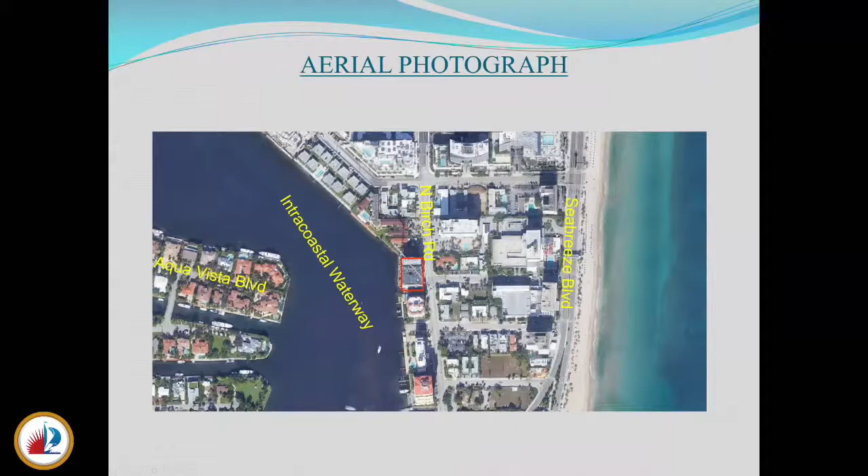This is another aerial photograph, and you can see the triple pile clusters out here in the water. They're a little difficult to see, but these are at 75 feet from the property line. And you can see the channel marker is way over here.

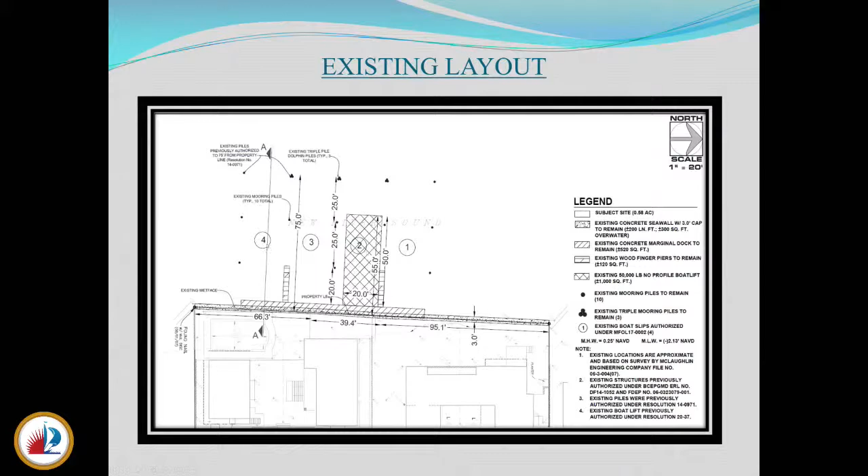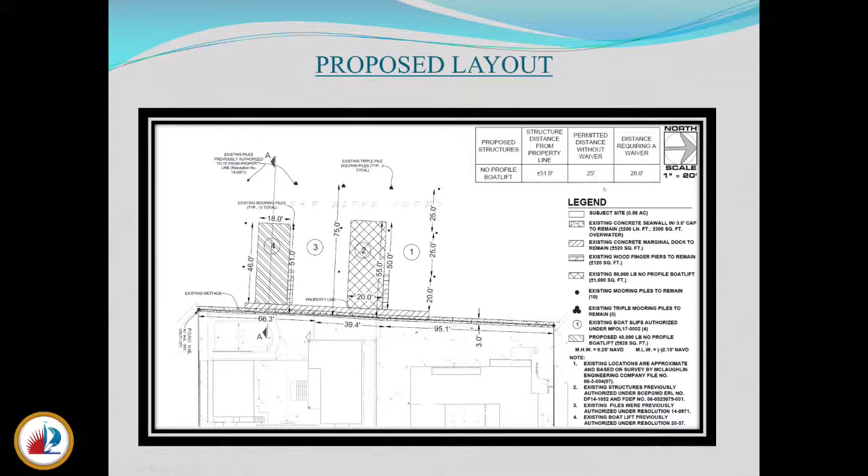This location, slip 4, is where we are proposing a 40,000-pound no profile boat lift, 51 feet from the property line. The lift is 46 feet by 18 feet, and this is to accommodate a 40-foot vessel. So the structure is 51 feet from the property line. The allowed distance is 25 feet, so we're requesting a waiver for 26 feet.

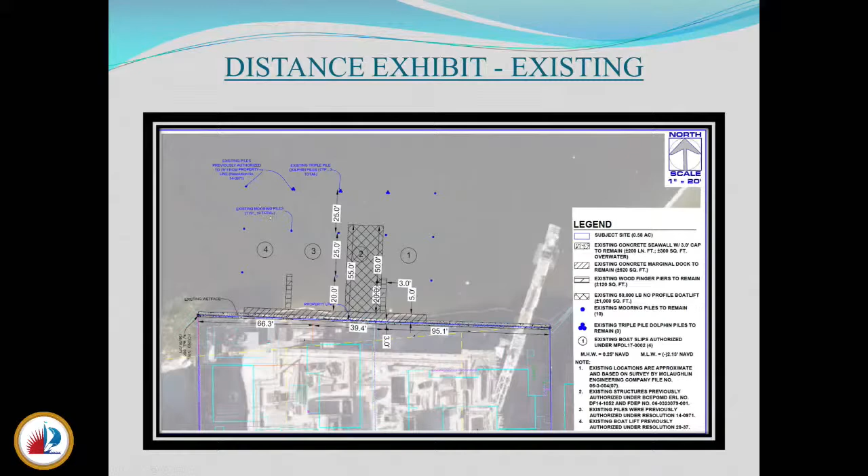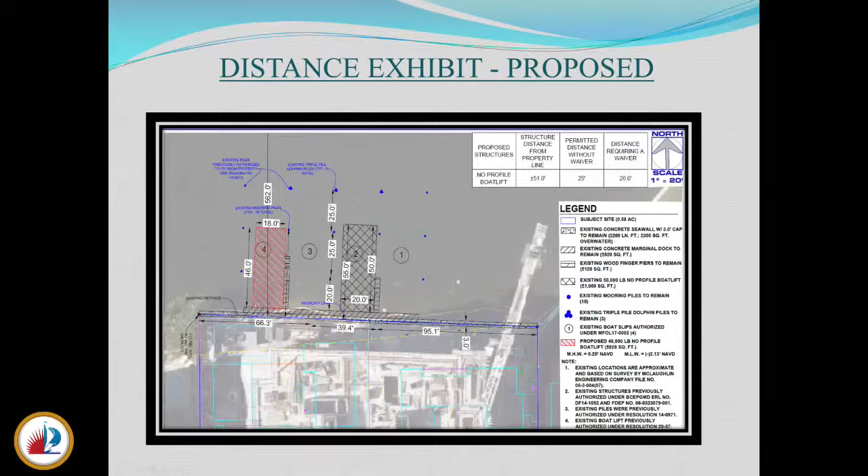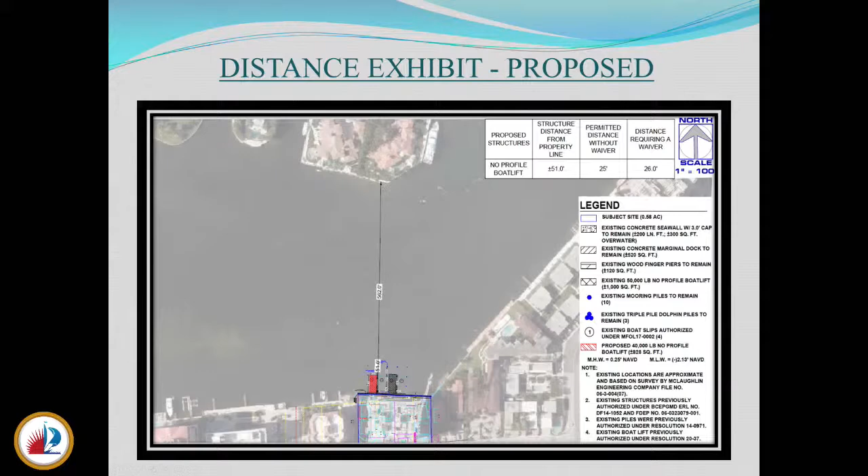Here's another view so you can see how wide the waterway is in this location. You can see in the red is where we have the proposed lift, and it's 562 feet across the waterway here. So again, 51 feet from the property line, and we're requesting a waiver for 26 feet.

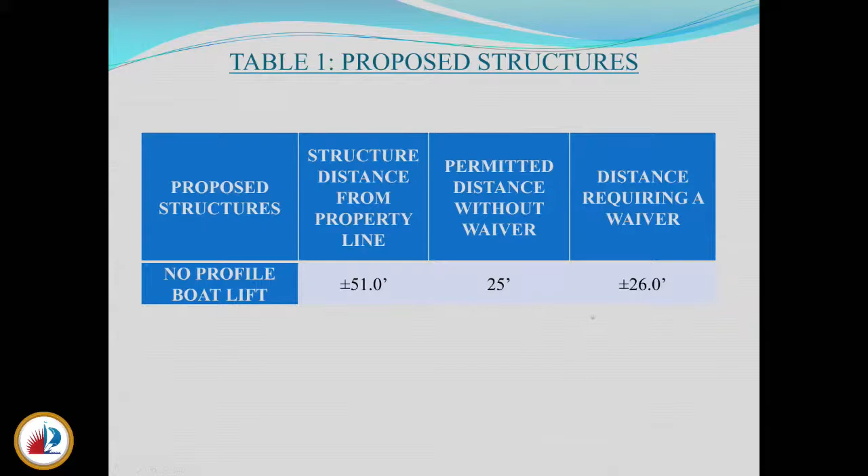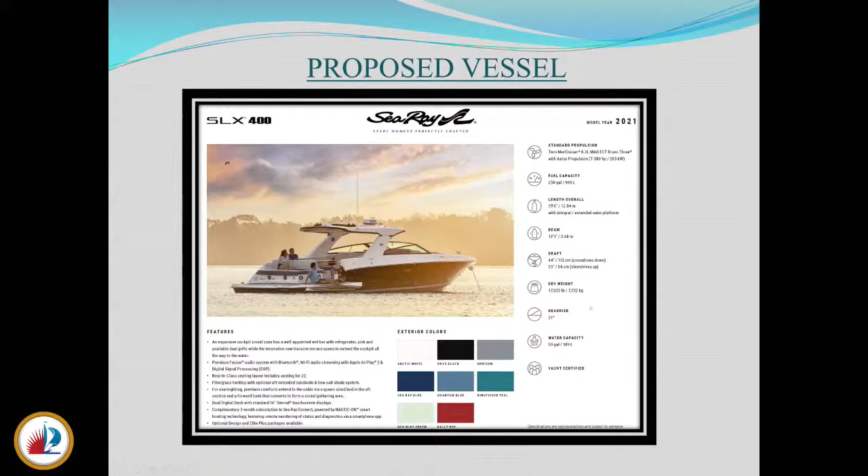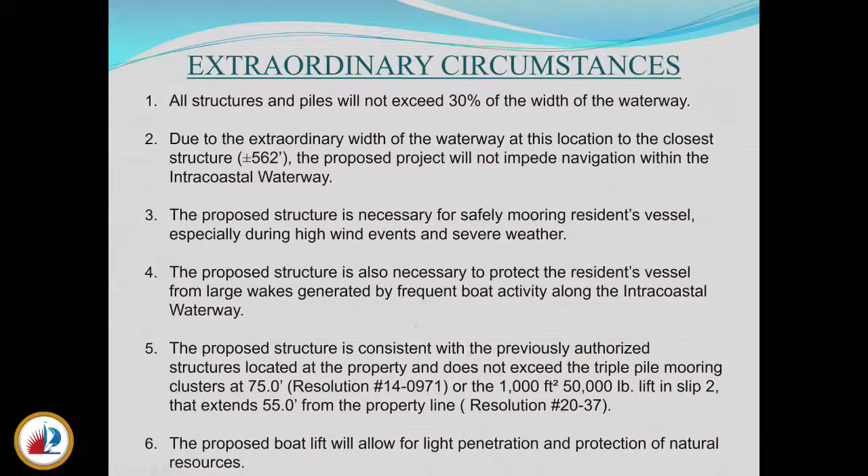This structure that we're proposing now does not exceed the previous resolutions issued for this site. We referenced the 75-foot resolution issued for the piles, and also the previous resolution just issued for a 50,000-pound boat lift in slip 2 that was for 55 feet. This boat lift will also allow light penetration to get through to the benthic resources on the bottom.

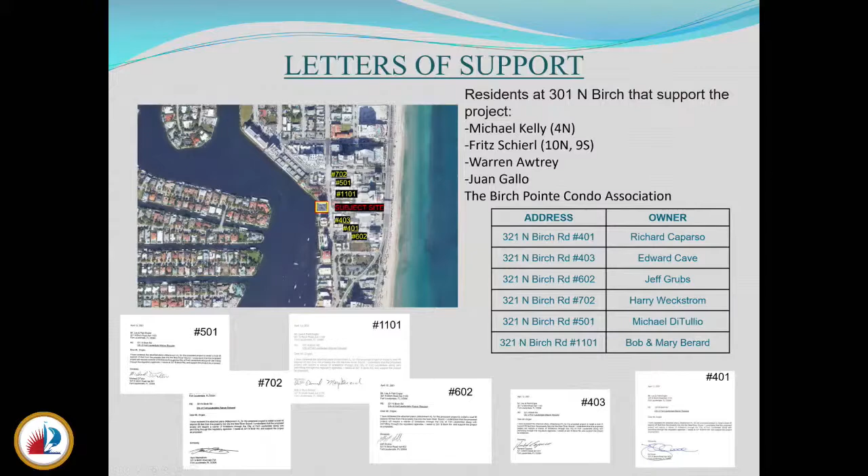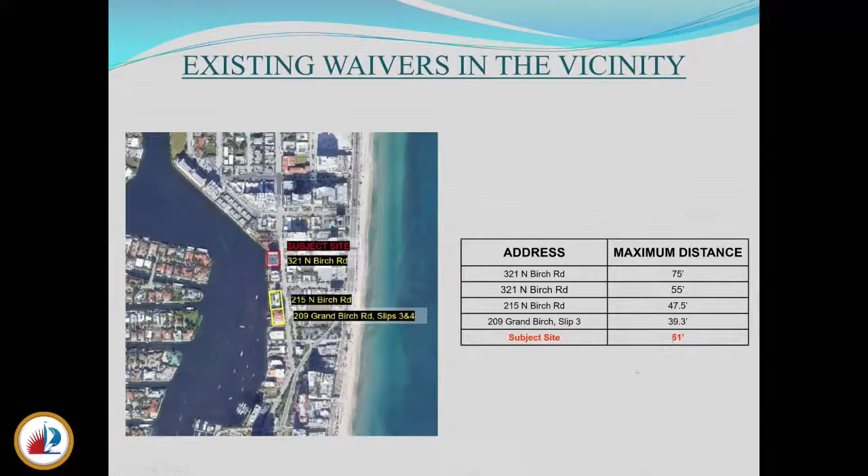With that, I'll turn it back over if there are any questions. Questions from the board? Go ahead, Ted Morley here.

Catherine or Tyler, you stated the waterway is 562 feet across in that area, and I'm assuming that's wet face to wet face. Do you have the dimension from the proposed lift location to the eastern marker of the ICW? That's really a more important measurement, how close it is to the navigational channel. I do not have it offhand.

You can see it right here. I believe it's over 100 feet. We already have authorization, or are working on authorization, with the Army Corps of Engineers, and may review that from a navigation standpoint to make sure we are at least 62.5 feet from that marker and from the edge of the channel. I think it would help to have that number in future proposals for us to look at, because we take that into account. I can see it on the picture, so I appreciate that image. Okay, we'll make sure to include that in the future.

Other questions from the board? What's the low profile lift look like?

It essentially looks like an extension of a dock, and it has bunks on it that the boat can drive right onto. So when it's in the raised position, it just looks like an extension of the dock with the boat sitting on it. There's no piles that extend above. The low-profile design is meant to be aesthetically pleasing so you don't have the piles you'd see with a 4-post lift. Okay, thank you.

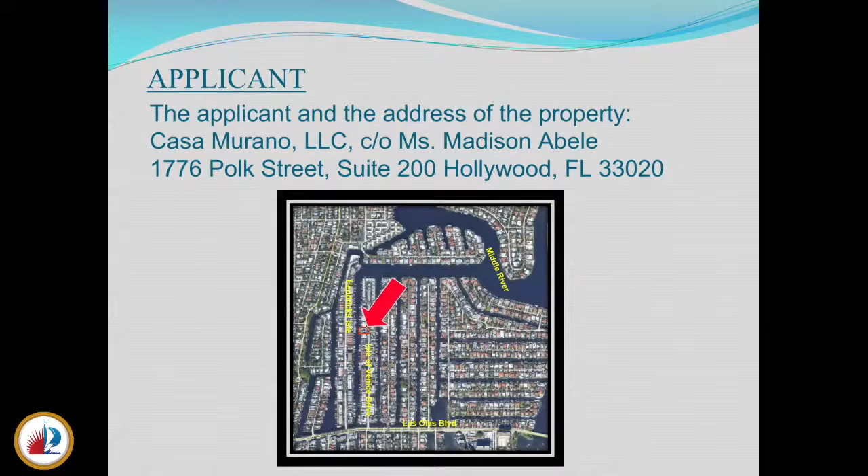Again, just another aerial photograph. This is the Rio Grande Waterway. Isle of Venice Drive is here. Las Olas is to the south.

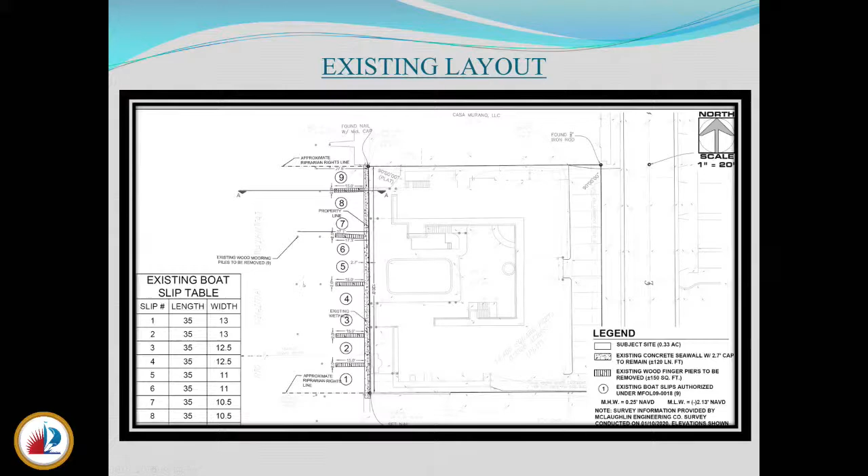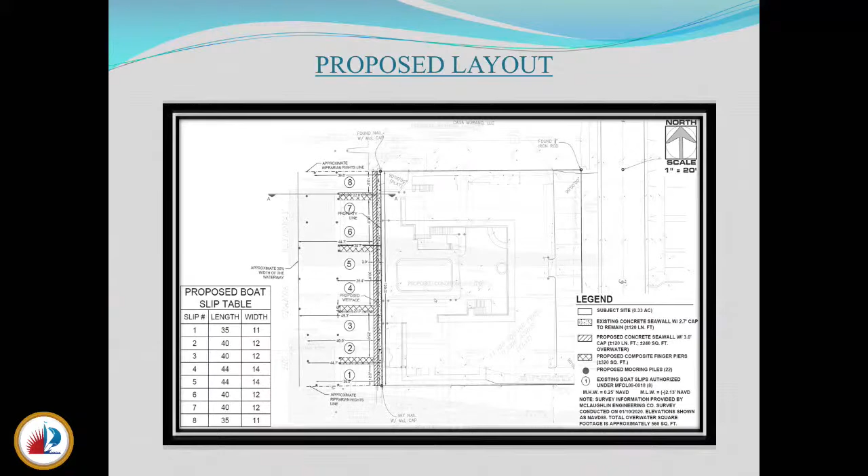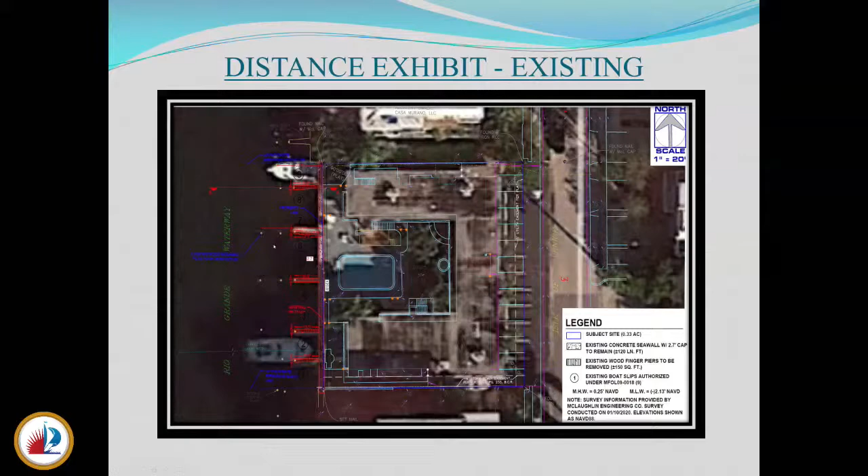So here again is just a distance exhibit showing the existing structures on an aerial where you can see the mooring piles out in the water that are at 37.1 feet. And here we have what we are proposing. And since there were multiple piles, we've got 22 piles that we're proposing, and they're at different distances.

So tried to make this as simple as possible and as clear. So we have them shown at 3 different distances. So all of the A piles are, there's 3 of them. They're 49.4 feet from the property line. And you can see this red line here is the 30% width of the waterway. So no piles and no vessels will exceed this 30% width of the waterway.

So the A piles are the furthest from the property line. And then we have these B piles, of which there are 4, and those are at 44.7 feet from the property line. And then there's 2 C piles, and the C piles are 39.8 feet from the property line. And then we have the D piles, which there are 13, and those are 26.4 feet from the property line. So the reason that all these piles are at different distances is because the largest vessels are proposed for these middle slips, and then they're going to taper down in size as you go towards the adjacent properties. So the middle will be 44-foot vessels, and then they'll get smaller as you go towards the adjacent properties.

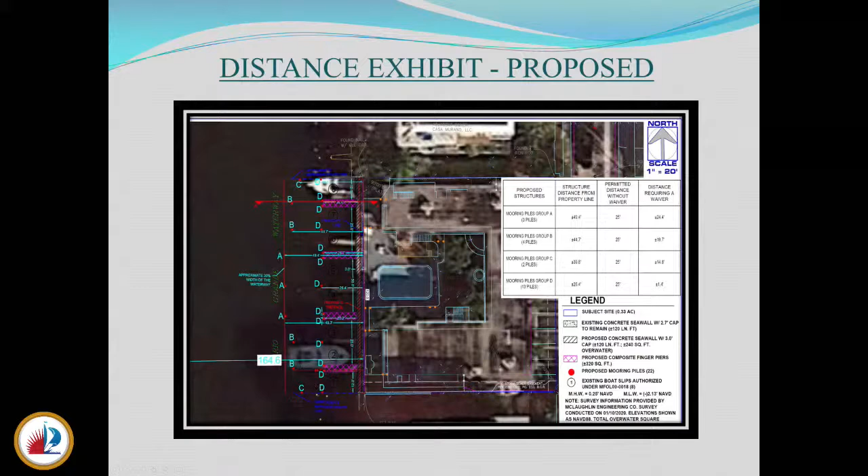And here is a zoomed out version where you can see that at the 30% width of the waterway, there's still plenty of room to navigate through this waterway. And the waterway is 164.6 feet wide in this location.

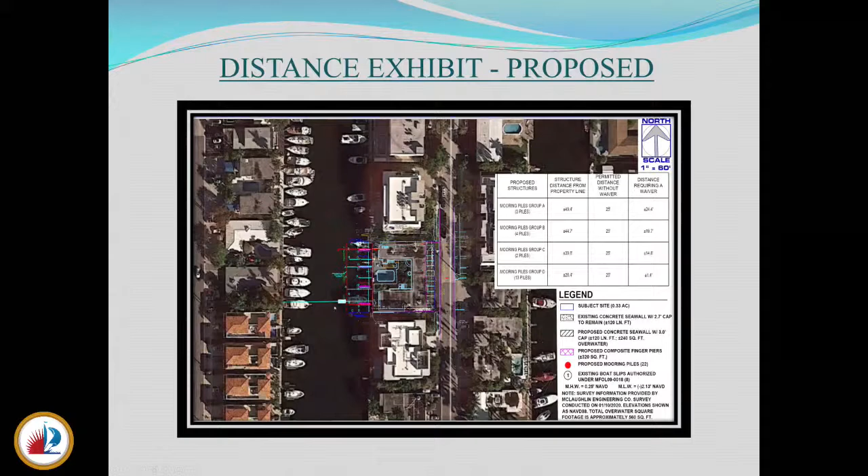Here's just another breakdown that I just went through of the different piles and the different distances. So the greatest distance that we're asking for is 49.4 feet, which requires a waiver for 24.4 feet. And then as you can see, the distances go down 44.7, 39.8, and 26.4 feet.

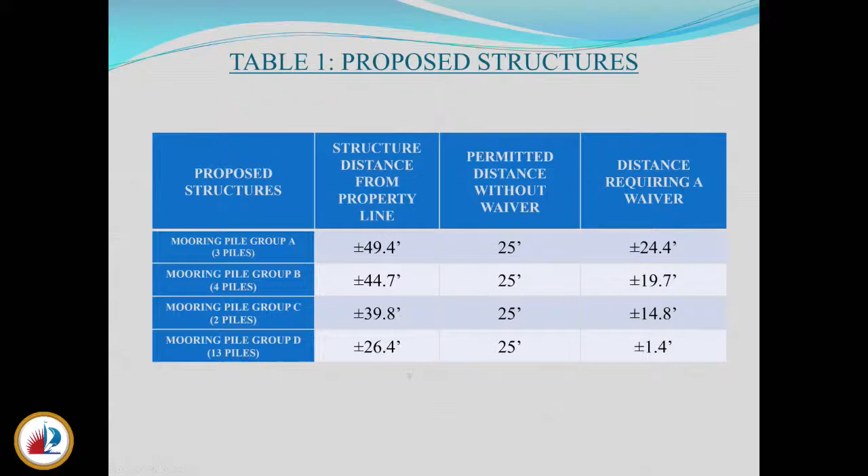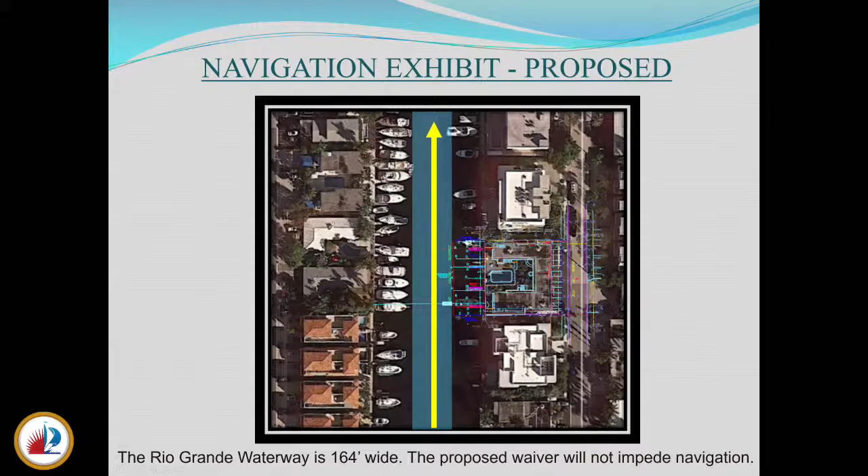And this is just another exhibit to give you a visual of the channel that is in this location, and that authorizing these slips and vessels to be moored in this location will not impact navigation and will remain outside of that 30% width of the waterway. So as I mentioned, nothing will exceed the 30% width, and that this waterway is 164 feet wide, and we don't believe this will be an impediment to navigation.

These mooring piles are necessary to moor vessels of this length in this location. And the project is consistent with other waivers that have been issued in the area up to 80 feet. And as you can see on the existing conditions, this is an existing marina that had similar finger piers and similar piles. And so the intent of this project is just to revitalize this site and put in replacement finger piers and piles for the new upland development that's going in.

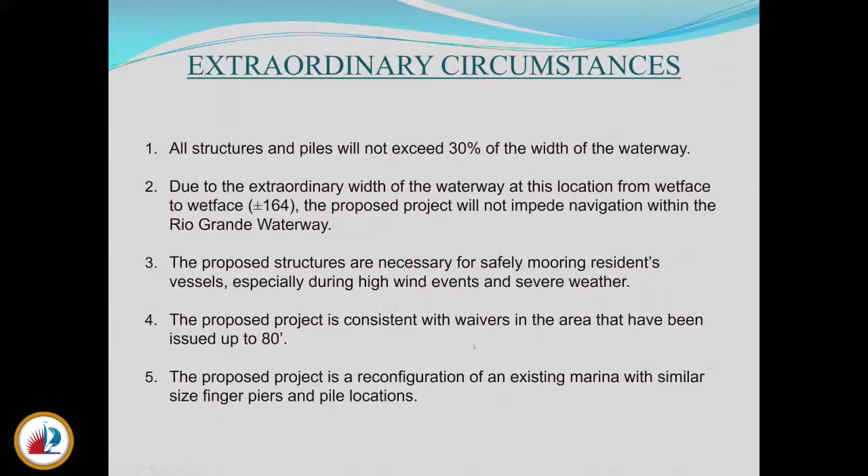For neighborhood outreach, a Zoom meeting was held on April 14th with all of the adjacent neighbors. 151 Isle of Venice, 133 Isle of Venice, and 300 and 230 Hendricks Isle were all invited to participate in this outreach and ask any questions or concerns they might have.

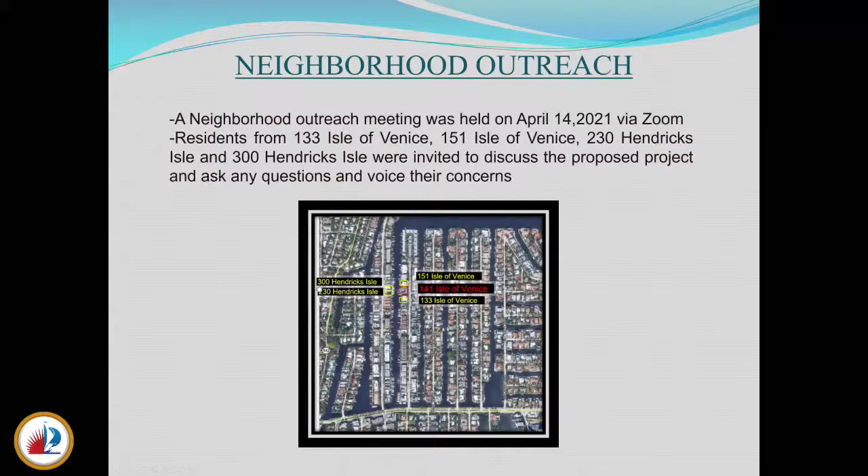This project has already completed all the environmental permitting. Army Corps of Engineers, as well as Broward County, who issued on behalf of the state, have all issued their permits. So this resolution for the mooring piles is the last step in the permitting process.

And with that, I'll turn it back over for any questions.

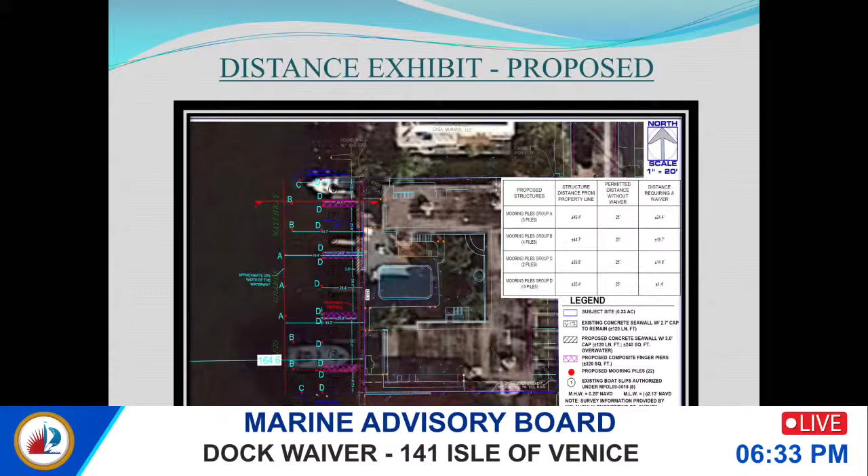Yeah, so Steve, the unit owners are the ones who are going to be utilizing the slips. So you certainly aren't going to have the clientele that you have there now. These are high-end condos, so you're going to have more of, not so much sailboats, but more of Sea Rays and the type of boats you'd see for cruisers and that kind of thing. Understood, and that's why we're losing a slip, because we're trying to accommodate a wider beam. So that's part of that as well. Thank you.

And you had mentioned, Kat, that the max would be 44 feet. Correct, that you would put in there. Is that going to be regulated by the condo board itself, or how is that going to be regulated? Because if you have more beam in one of those bigger slips and somebody wants to put in a bigger boat...

Hi, this is Barbara Hall, I'm the attorney for the applicant, and I just wanted to say that our condo documents will include that restriction, and we're even prepared to have the waiver include the length of boat as a restriction. So either would be fine with us, but it will be in our condo documents. Thank you for that clarification.

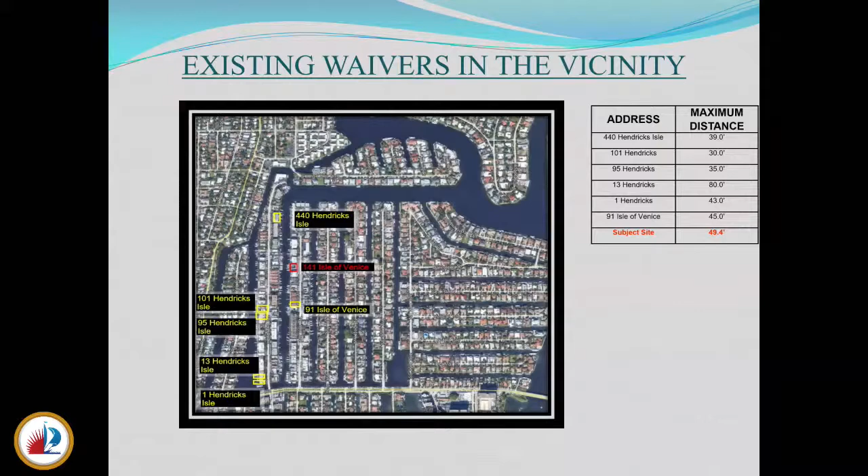One thing with the 35-foot pile, that seems to be the acceptable amount that you'll have no problem with the neighbors or anything else. Seems like they were in agreement that 35 would be adequate for the neighborhood, so you probably wouldn't have objections from neighbors as far as safety or navigation problems. So to appease neighbors and everything else, that does sound like a realistic figure.

Well, I'm just looking, we have 91 that received a 45-foot waiver, and 440 got a 39-foot waiver. My concern here is just precedent, right? The reason to grant a waiver is extraordinary circumstance. It's not defined under the law, so it's left to this board, and why we grant the waivers defines what extraordinary circumstances means.

And that means the precedent is created by what we do. So now we have Isle of Venice, and we've granted a waiver at 91 for 45 feet and 440 for 39 feet. And I'm hearing that it really should have been 36 feet. And the subject site, which is asking for 49.4 feet, is too big.

So we have to reconcile that in order to be within our existing precedent. We could start a new precedent now and focus on 36 feet. Agree, but then the problem is your new precedent suggests that your old precedent is wrong, and you're going to have to reconcile that. Then it sounds like the old precedent was wrong, and we've learned from doing that, and moving forward it sounds like 36 feet would be best.

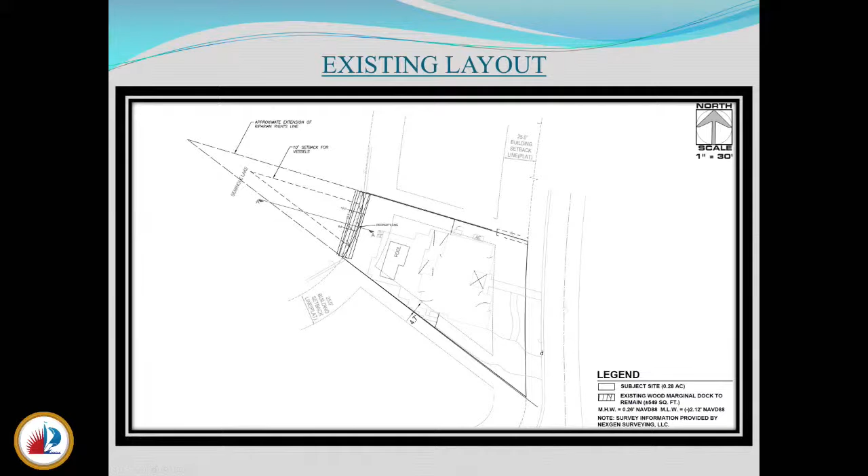The proposed project consists of a new wood finger pier, 25 feet by 4 feet wide, and installation of a wood mooring pile extending 20 feet past that finger pier. Overall, the finger pier would extend 33 feet from the property line, and the mooring pile would extend 53.5 feet from the property line. Since these distances exceed the 25 feet mandated in city code, we are requesting a waiver tonight of 8 feet for the finger pier and a waiver of 28.5 feet for the mooring pile.

These structures are necessary to accommodate a 60-foot vessel and a 25-foot vessel. This was the most practical layout to accommodate these vessels, given that there's only 32 feet of dock here to keep the vessels outside of this side yard setback.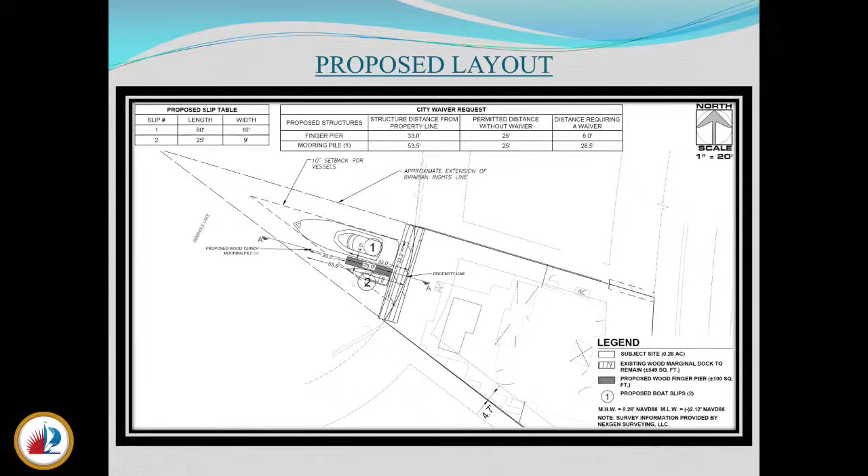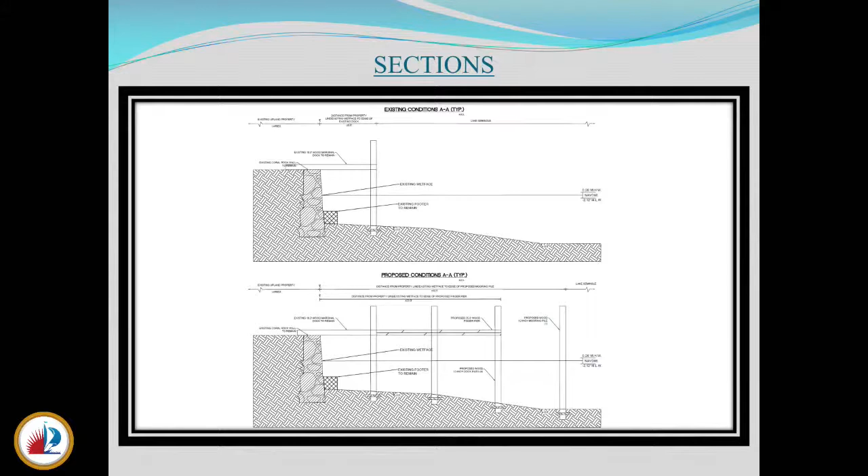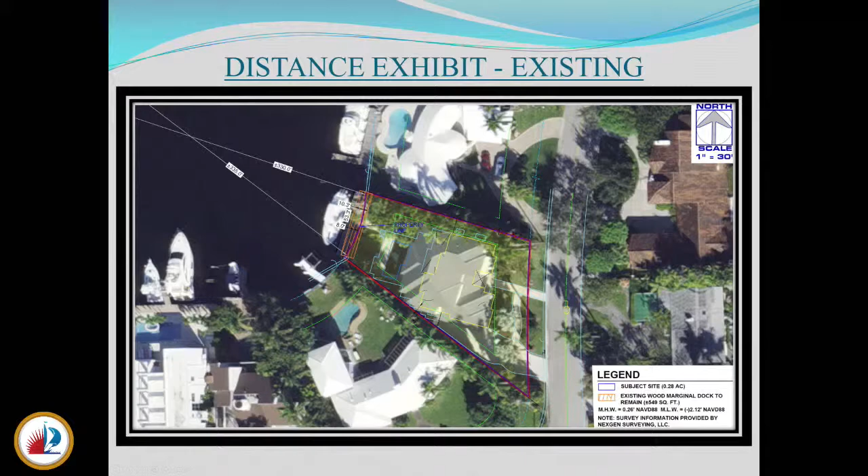There are finger piers and mooring piles that extend 30 to 35 feet, all the way out to 55 feet from the property line. There are also vessels that extend as far as 65 to 83 feet, and 45 feet, just to give a general idea of how far these vessels extend into the waterway.

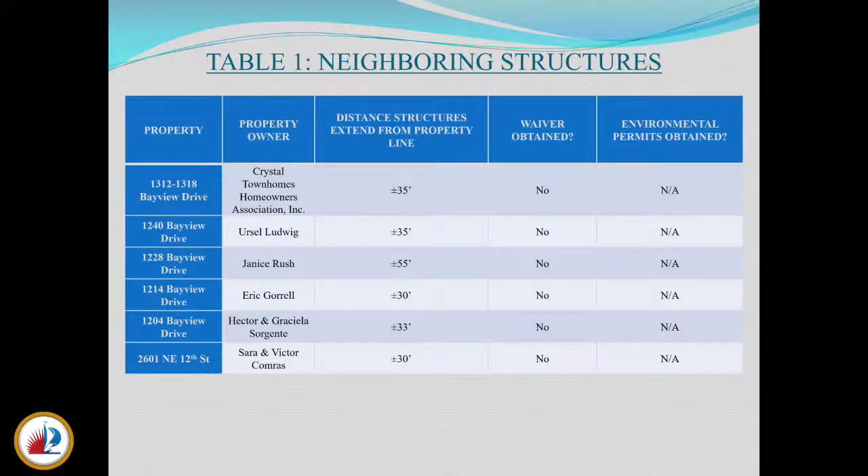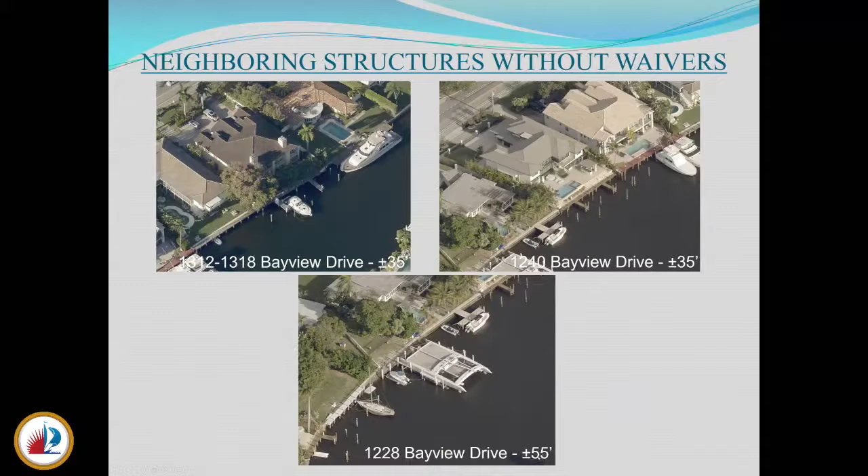Here are some aerial views of properties that exceed the 25 feet from the property line. Most of these properties have finger piers and mooring piles as the applicant is requesting, extending 35 to 55 feet from the property line. Here are some more that also have finger piers and mooring piles that are 30 to 33 feet from the property line.

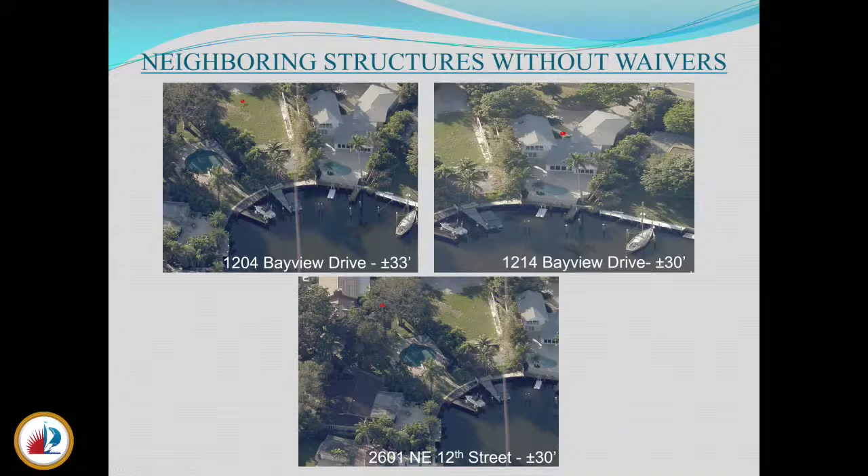Overall, we're requesting a waiver for a finger pier to extend 33 feet from the property line, which requires a waiver of 8 feet, and a mooring pile to extend 53.5 feet from the property line, which requires a waiver for that 28.5 foot distance.

The extraordinary circumstances that warrant this waiver request include that all the proposed structures and piles do not exceed 30% of the width of the waterway, as the waterway is approximately 330 feet at this location. It will not impede navigation. These structures are also necessary for safely mooring the residents' vessels during high wind events and severe weather.

Most importantly, the angle of the applicant's property lines, due to the unique shape of the property, does not provide adequate length along the existing dock to moor parallel for a 60-foot boat. Since we're also trying to adhere to the 10-foot side yard setback required in this zoning, this is the most practical layout to accommodate the applicant's 60-foot vessel.

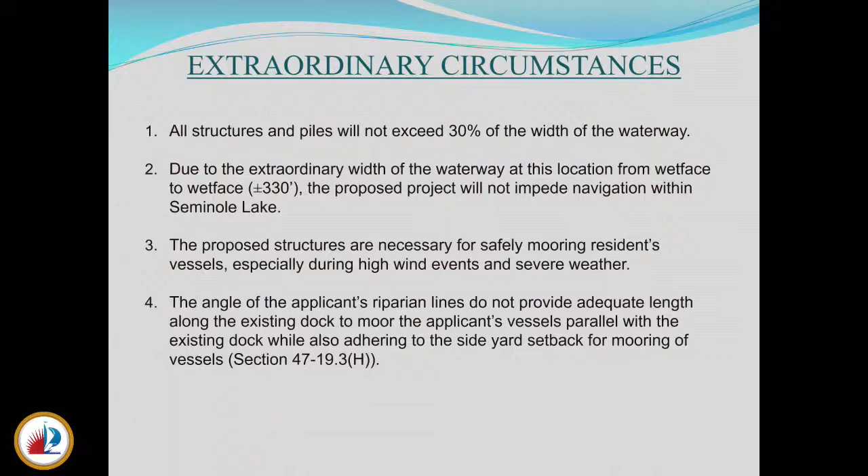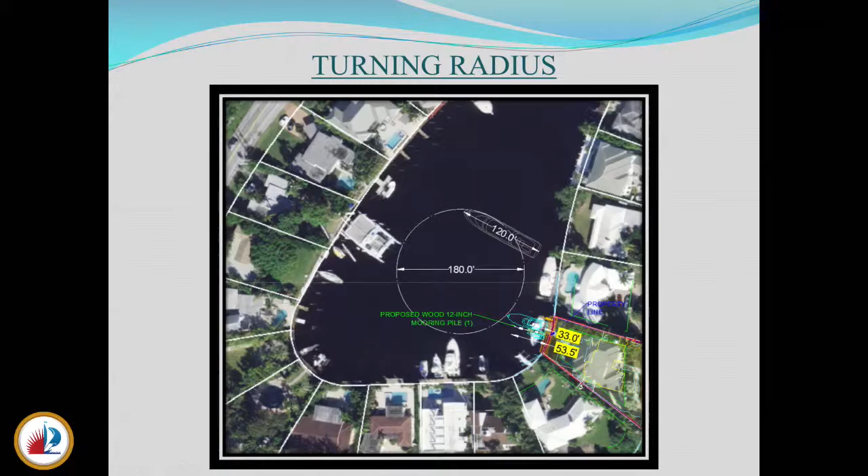Just to reiterate, the applicant previously had a finger pier and mooring piles at this location and wishes to reconfigure his dock so he can accommodate the 60-foot vessel, which he previously had moored perpendicular to the property, similar to other property owners on Lake Seminole.

Four letters of support were obtained from neighboring properties. Just to note, one of the property owners at 1201 Seminole Drive had their letter of support revoked, and then the property was sold.

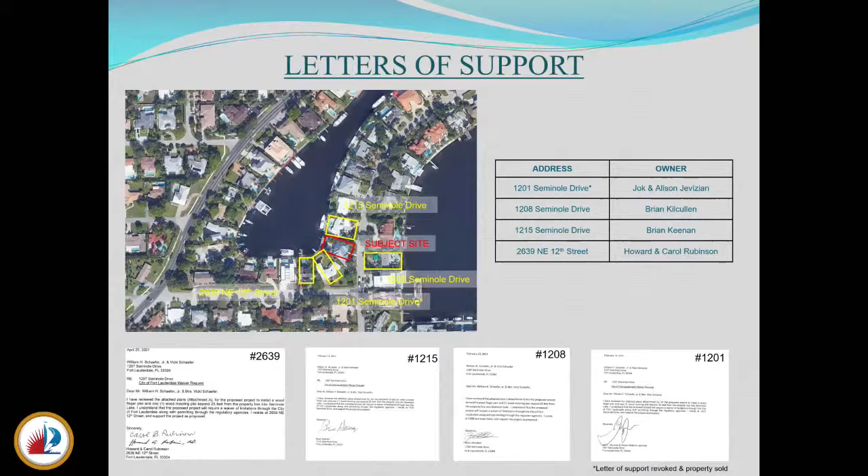And there are a few existing waivers within the vicinity of the proposed project. However, most of these waivers were obtained in Sunrise Bay, located just east of where the property is, and there was no record of any waivers being obtained within Lake Seminole.

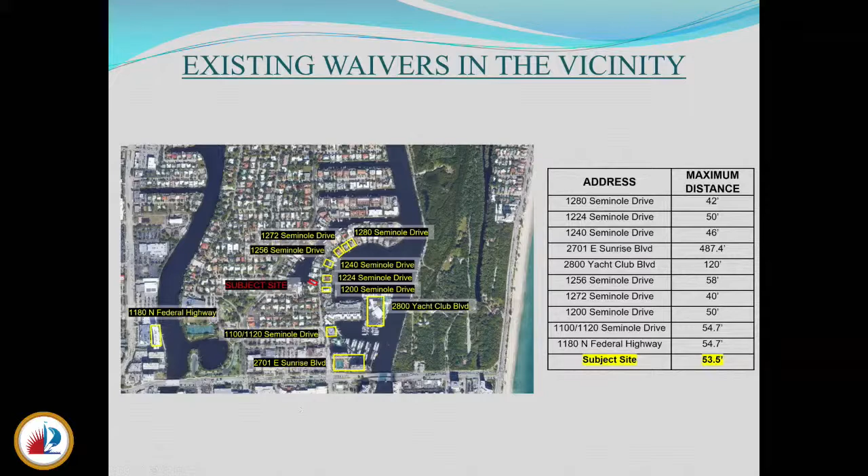And with that, I thank you for your time, and I'll open up to any questions.

Just to further that, the moral of the story is that we're trying to do the right thing and get a waiver, even though everybody else on the lake doesn't have them when they're supposed to have them. So we don't think we're being inconsistent with what has been utilized on the lake as far as navigation and safety. People are utilizing the lake, and the turning radius we presented shows that. So we would like to request the board's approval, given the ability to moor perpendicular at this location, given that it was previously there, and that the vessel size we're proposing is consistent with vessels on that lake. Thank you.

Okay, let's have some discussion at the board level here. We'll go with Ted and then Ed Stroll. Thank you, Chair. Ted Morley speaking.

Jenna, can we go back to the plan view that shows the two slips you're looking at putting in, that has the triangle with the riparian extensions from the nearby properties? While you're getting back to that, I'll make my questions and comments. My concern, and great presentation by the way, very detailed, love the turning radius, is that this is a very unique property. As you stated, it's a triangular shaped property, so a lot of the other properties in the area with larger vessels or larger structures are not.

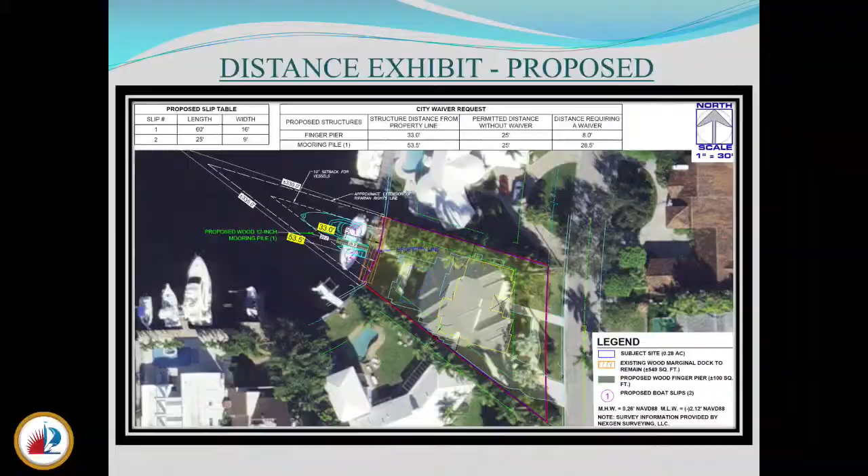The access for 1201 is similar to the access for 1207, and that property is also a triangle. Right now he has a finger pier with a boat lift on one side. He would obviously be utilizing the slip perpendicular as well, like he is now with the boat lift, and then the slip on the other side. So he would be coming in towards the property and mooring perpendicular to the property, like we're proposing. He wouldn't be coming in at an angle, from the north to the south into the dock as if it was marginal. He would be coming in from the northwest into the slip.

Okay, follow-up to that: the current vessel there looks like a smaller, maybe 40-ish Intrepid. The 60-foot boat the applicant is planning to put there—does he own that vessel now? If so, can you give us an idea of its size, dimensions, and beam? The existing vessel is a 42 Intrepid center console, and the applicant is getting older and wants more of a cruising type vessel than a center console, so they're going with a 60-foot Azimut, similar to this boat on the left in the picture, which is a 55 Azimut.

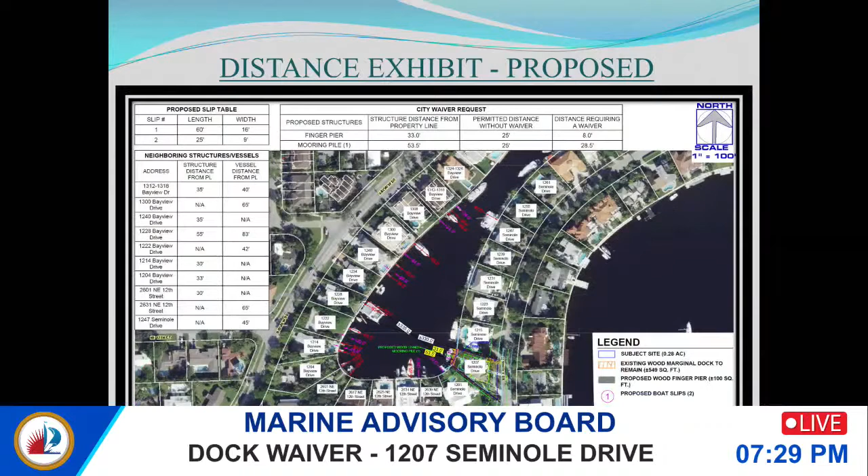You can see there. See how their point is going to be up near where the green lettering is, and then the other point comes out at an angle. Yes, they have a much smaller triangle actually. They have a square shape - on the left side they're more flat, and then on the right side they'd have the pinch point.

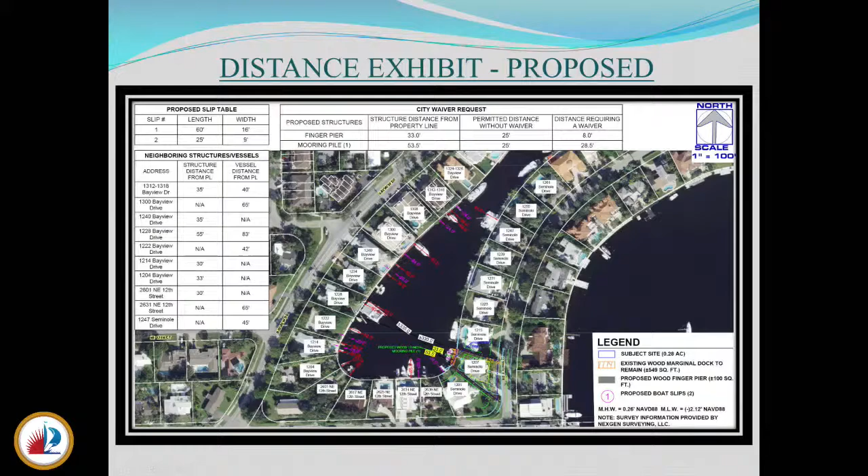Tyler, whoever moves into 1201 is what he's saying - basically, that person over there, no way, shape or form can have a boat parallel to shore. They have to make sure they put theirs the same way as the other one, perpendicular to the shore, because there's no way they could come in and dock a boat that way. That's correct, 1201 is going to have perpendicular mooring, which is what they have now.

The new person buying that property would be limited not only in size but also in the configuration of how they'd put the boat in. They could not put a boat in parallel like that other boat is right now - there's no way you could dock one like that. They'd have to make sure all the boats in that area are basically perpendicular to the shore, correct?

Yeah, 1201 would - if they were to go to a marginal type mooring on that site instead of the finger pier they have now - it would be similar to what we're saying, where you'd only have about 20 or 30 feet to moor a boat. You're limited to the size of the boat. Everybody is, and that's why you're going perpendicular - you don't have enough room on these corner parcels to moor a normal sized vessel. It'd have to be a 20 to 30 foot boat.